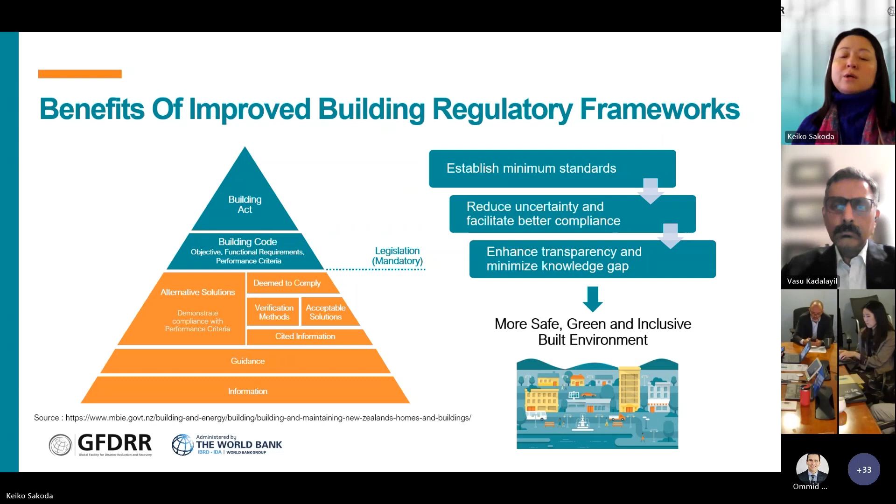But by improving the regulatory framework, we can remove this kind of knowledge gap.

Now I would like to talk about how our team works with the country teams. We work with the country team across different project preparation cycles, and we have different tools across different stages. We join from the initial scoping and dialogue session, where we do a quick analysis of the regulatory framework of that country, and try to pre-identify possible entry points for the dialogue.

Once the dialogue advances and the client is interested in this topic, we provide more in-depth diagnostics, and that's where our tools come in handy. I'll talk about it later.

The next step is about prioritization of investment activities and policy reforms. We have cases of supporting both DPOs and IPFs. In both cases, we help the teams, or the government, identify the prior actions and indicators for the DPOs, and investment activities under the IPF.

We also stay on to support the implementation aspect if the project goes to the board and starts the implementation cycle. Now I would like to talk about two tools that our team has for the diagnostic aspect.

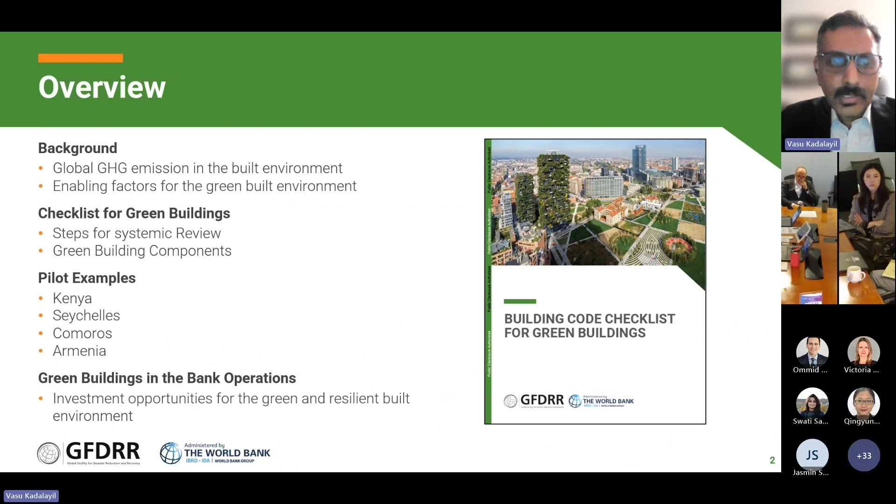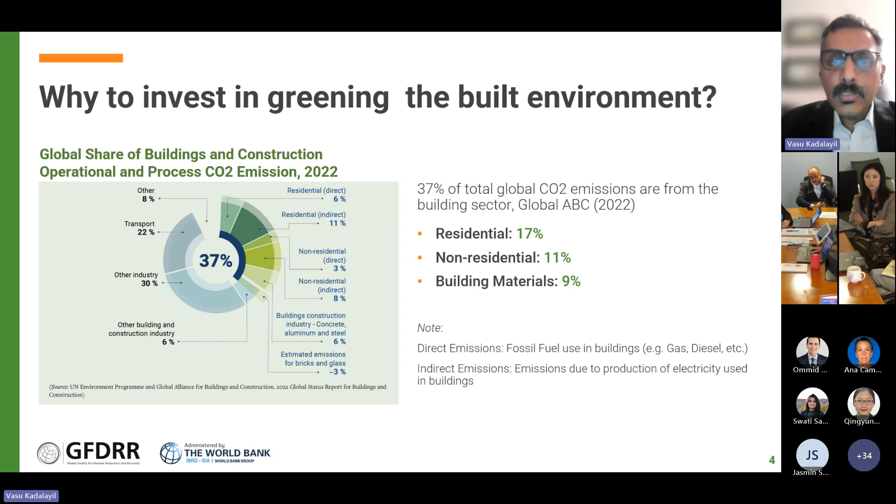So, of course, why invest in green building? Buildings contribute to approximately 37% of the CO2 emissions across the world. The broad breakup being that about 17% comes from the residential sector, 11 from the non-residential, and 9 from building materials. This data is from the global ABC, the global buildings and construction report that happens every year.

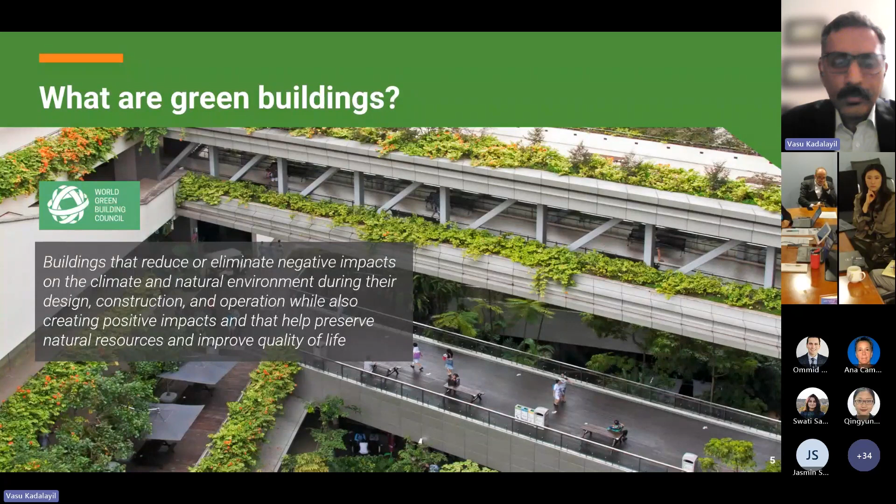This is a very telling statistic that buildings have a lot to do, and improvements of buildings can actually make a huge difference in the global GHG emissions. And what are green buildings? There are many definitions of these, but probably the World Green Building Council's definition can give a fairly large, all encompassing scope. Some call it energy efficiency, some call it by other names. We will also look at it in the checklist itself, where you'll see it has a broad swath in terms of how we define green buildings.

Basically, the CO2 emissions in the green building sector follow the building's fairly long life cycle. Right from material manufacture, which includes extraction of materials, whether it's steel or cement or clay for flooring tiles, and so many other things come from extraction of materials. And then, of course, they're processed, manufactured, and transported. So all of these have certain GHG impacts.

The design process is the point which actually gives you the opportunity to reduce the resource impact, or rather enhance resource efficiency. Broadly, it could be done through energy efficient design, water efficient design, and materials. These are the three pillars on which green buildings stand.

The construction process itself can be streamlined to make it less energy intensive, less water intensive, less polluting. But of course, the big chunk of the greenhouse gas emissions will come from the operations, broadly in terms of the energy and water use.

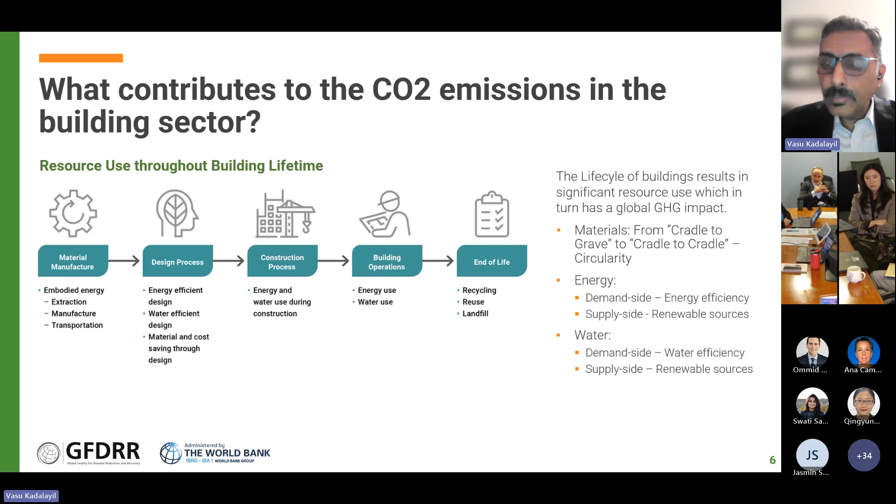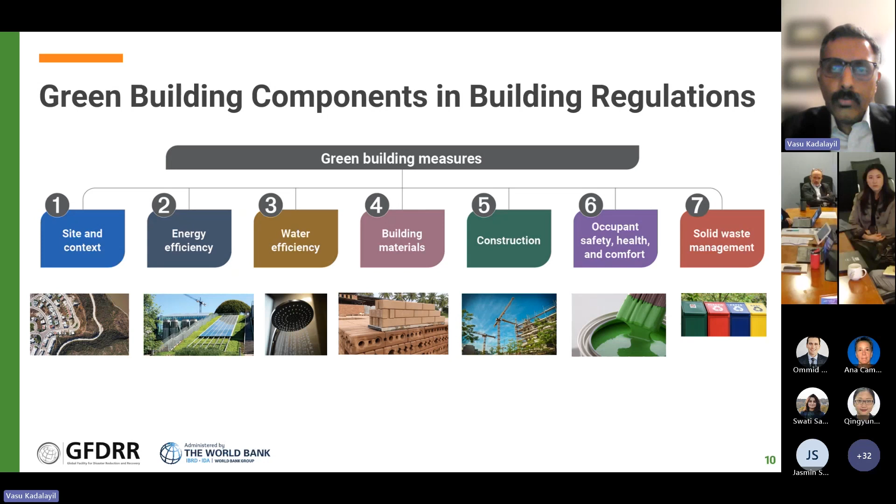We have energy efficiency, which really is the core, in a way, of the number of measures that one can use to achieve a good amount of GHG mitigation. Water efficiency is extremely important - like I said, it's a finite source.

Building materials is another aspect, because once you've selected a building material, you're essentially locking in either a very efficient, low embodied energy material, or a very high embodied energy material. The idea is that by selecting low embodied energy materials, the market will give signal for the building manufacturing market to have lower embodied energy material.

Just to give you an example, I live and practice in South India, and bricks used to be, until about 25 years ago, the most common material for masonry. Now it's almost out of the market, at least where I practice in Bangalore - we've switched to concrete blocks, which have much lower embodied energy. In terms of that whole market transformation, it just makes so much sense.

Construction, of course, is another aspect that one needs to be extremely mindful about, especially now in emerging economies where you have so much construction happening, that construction pollution can really become a big aspect of a city's pollution, like places like Delhi, which comes in the news every winter.

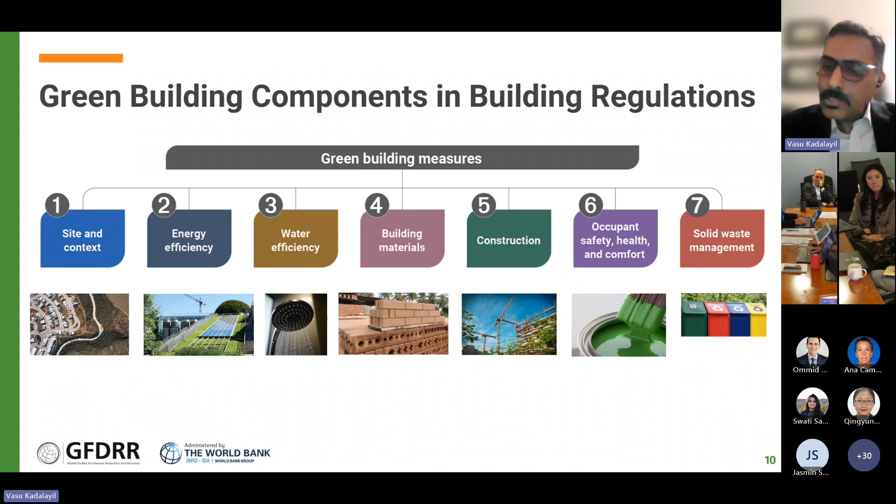Now that has an impact. So if you can design buildings which encourage occupants to segregate waste, it's always much better for the environment.

So just breaking these down, for site and context we looked at 3 broad topics. One was to be able to do some target setting and also create the project team right in the beginning. Ecology and environment is another aspect that one needs to look at.

What kind of ecology are we siting the building in? Does it have far-reaching implications on downstream effects on the environment, on the soil, on the flora and fauna, and all those things? And then, building and transport.

So where is the building sited, and how is it connected to the transport? Is there efficient public transport coming into the place near the building? All those things are as important.

On the energy side, we are really looking at reducing the demand side. That means, let's say, if you have more efficient lighting, more efficient walls, better insulated walls, that would reduce the need for either warmth or for cooling. That's sort of the idea of reducing the demand side measures.

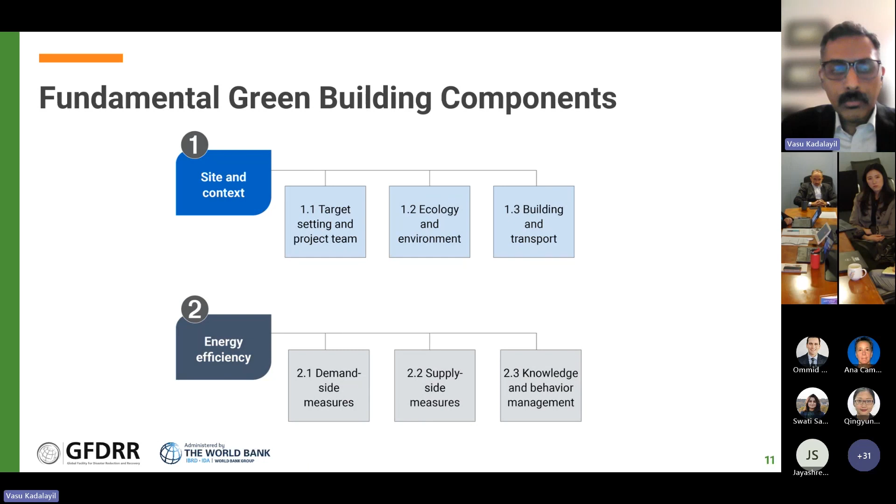On the supply side, you're looking at alternative sources of energy like solar and all that. And then, of course, there is the aspect of knowledge and behavior management, by doing sub-metering and various other aspects that will actually encourage users to lead a much more energy efficient lifestyle.

On water efficiency, very similar. Look at the demand side in terms of having low flow faucets, better showers, and things like that. And on the supply side, try to see if there are renewable or more resilient ways of sourcing water, like rainwater, where possible, so that you're not extracting precious groundwater. Those are the aspects that one can look at a building level. And then, again, the knowledge and behavior management.

Building materials, like I said, looking at recycled building materials, and with more emphasis on circular economy, there is a better way. Just to give you an example, steel is something that's getting recycled across the world now. While you might use virgin steel for reinforcements, you might use recycled steel for security purposes, like grills on your windows, that can be made out of recycled steel. That's becoming a common practice, and we're hoping more companies can take responsibility for the entire circularity of this.

And then, of course, looking at the low embodied energy materials itself. So that has a big impact to play.

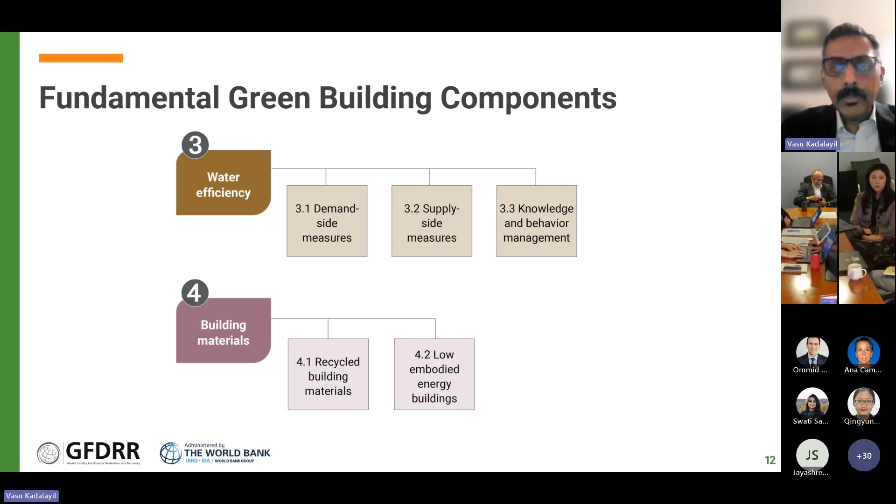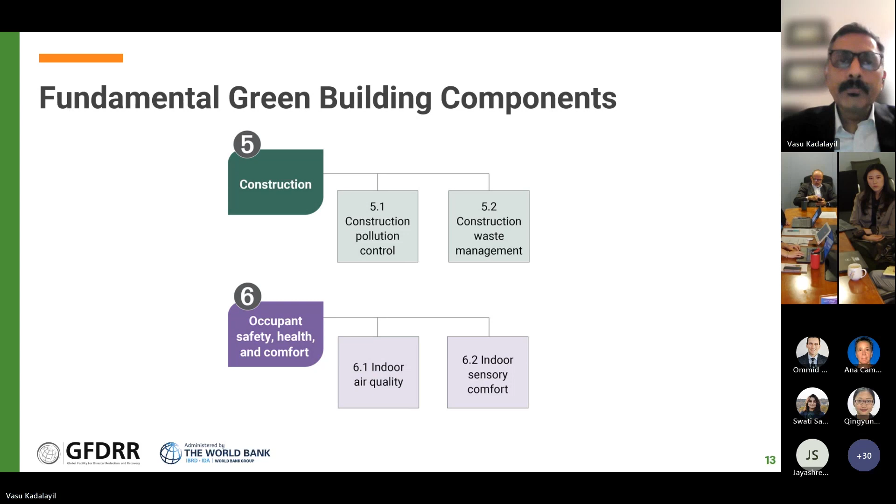Then, of course, the smaller aspects in terms of construction pollution, not really small, but things that need attention. Occupant safety, health, and comfort in terms of indoor air quality, indoor sensory comfort, the CO2 levels inside, especially in large format spaces like hospitals, offices, and hotels. And then the solid waste management, in terms of at least the segregation of waste. So these are the sort of 7 broad components that we have.

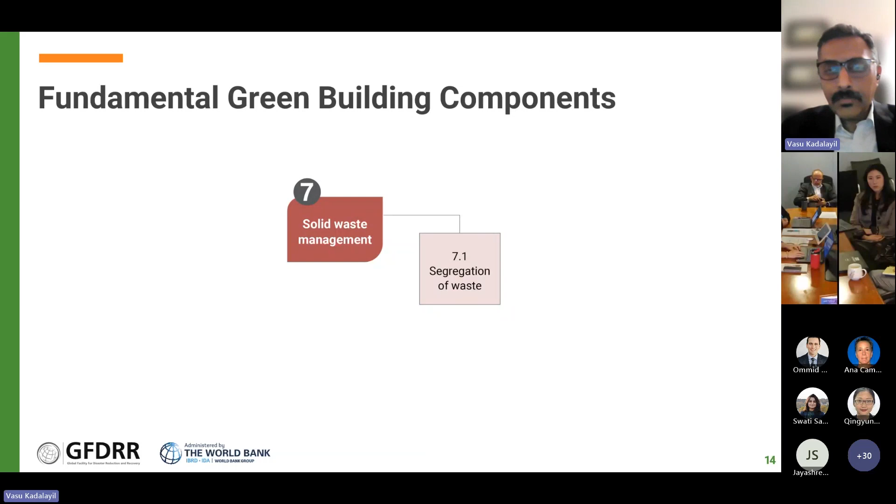So the checklist really is based on this. And some of the interesting aspects, before I get into how to use the checklist, is really the policy instruments that can be used for scaling up green building. This is something that would be useful for people at the bank. You have 2 broad types.

You have the non-financial incentives, and these are just a few examples, not exhaustive. There have been countries which have had expedited approvals, for example. So if, let's say, a building approval takes 4 months, they would expedite it by a month so that the project can start earlier if it's a green building.

Or certain municipalities give you a higher floor area ratio, which is essentially, if you have 1,000 square meters and the floor area ratio is 2, that means you can build a total of 2,000 square meters on that 1,000 square meter plot. In some cases, they would give you an extra 10%, which helps the building owner build more for the same cost of land, making your per square meter cost of floor area slightly cheaper. Those are incentives on the non-financial side that governments can provide.

On the financial side, you have property tax reductions and lower mortgage rates. Certain countries have had, in fact, I think IFC has been active with banks across the world to try to reduce mortgage rates for certified green buildings.

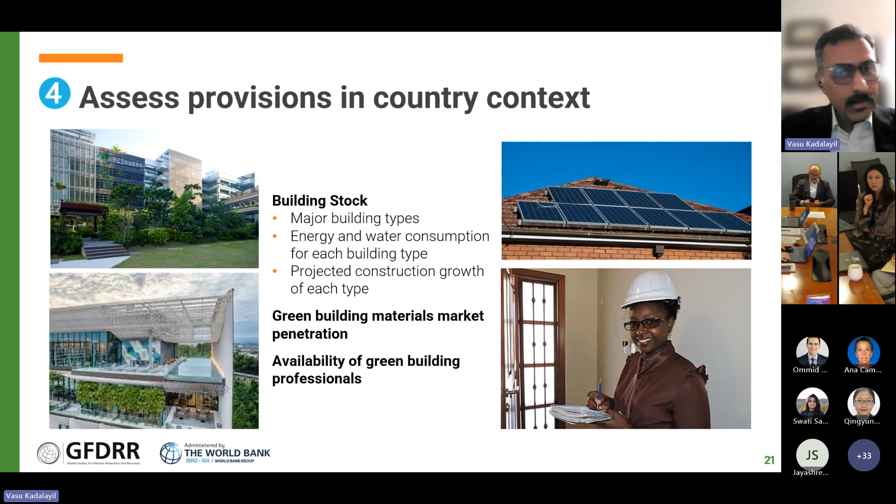What and how well have green building materials penetrated into the market? For example, is solar PV something that's available or not? One needs to be very sensitive to that aspect. Also, what's the capacity out there—how many green building professionals are available, and what institutional structures are available in that country? These are absolutely important to look at as well.

And there's also this interface with other regulations that happens. This is just an example of India, on the building regulation structure itself, shown on the left-hand side. You have the National Building Code, which is not mandatory, just guidance. Then you have the state-level Town and Country Planning Act, which is more of an enabling act. And at the municipal level, you have the mandatory building regulations—but the green building code itself may work in a slightly different way.

In India, for example, you have a separate Energy Conservation Act, which was passed in 2001, and then the first Energy Conservation Building Code that came in 2007 and later got revised in 2017. But you can see that it's very clearly only energy, it doesn't consider water. Water has again been regulated at the municipal level separately, depending upon which state one is in. So it's very important for the country team to understand what the unique complexities of the interface with the other regulations are.

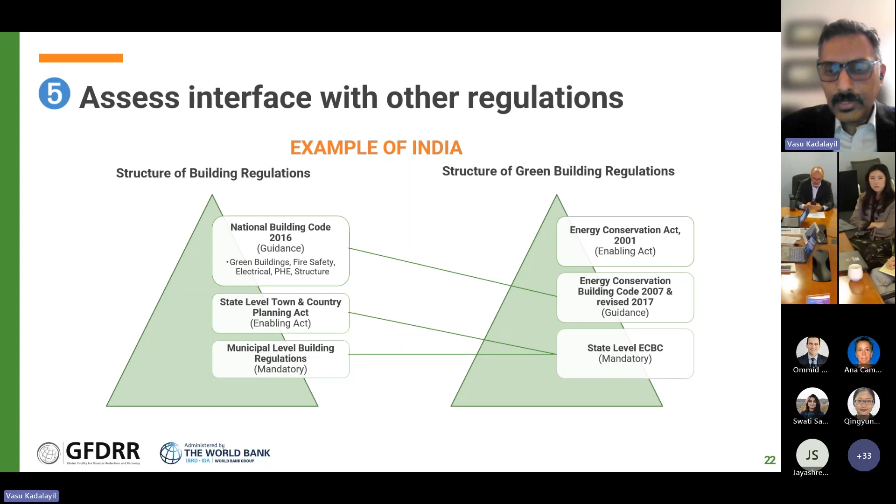And then, of course, you complete the checklist. You can put it into an Excel sheet and look at all the recommendations and put it down as an aspect.

We did a few pilot examples. I'm going to go through this quickly because I see that I'm at the border of the time limit.

In Kenya, there were two codes that had come up for review: the National Building Code itself, and a separate regulation on green buildings. What we found is that they wanted to include all new buildings into this entire space and regulation, and at some level it was trying to mimic the green building certification system. There's always this danger of the government becoming too ambitious and trying to have very high standards for green building regulations. So our recommendation was that it's probably a good idea to first do capacity building prior to the launch, and also to simplify the code itself. There were also some ambiguities regarding certain performance benchmarks that they had mentioned, so we put in our recommendations to simplify those as well and make it more clear.

Then we did Seychelles, which was a broad physical planning building regulation getting amended in 2022. We found certain measures for water efficiency that were not clear, and there weren't too many on the energy side as well. So we felt there was a need for a more rigorous approach to resource efficiency and also better clarity in terms of benchmarks for green measures.

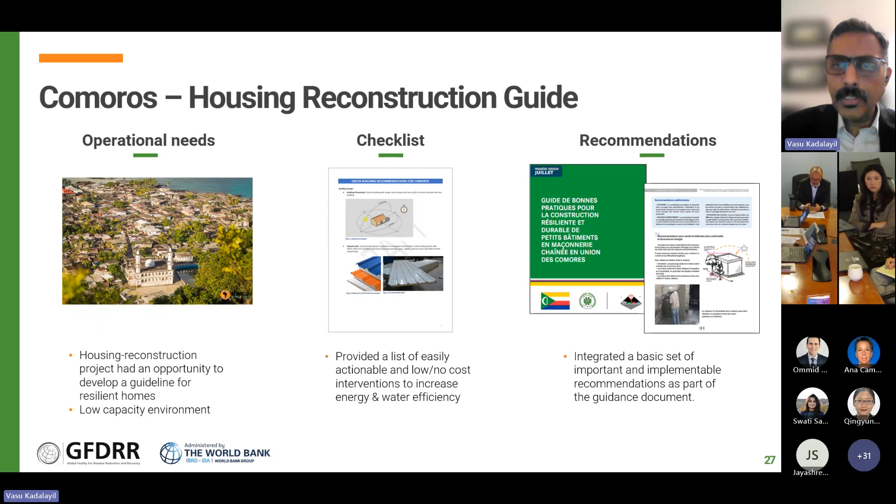Armenia is work in progress right now. What we found was that broadly there were two energy efficient building regulations, one published in 2016 and the other in 2022. We were called in to look at the 2022 version, and we found that it's more a methodology to estimate heat gains and losses into the building, rather than being a directive. So it didn't have the approach that a normal regulation takes in terms of a prescriptive approach. What we've recommended is that this is probably work in progress, and you need a longer engagement on this, but what we are proposing right now is the development of a guidebook.

The idea is to look at two things: one is to put all the existing green building regulations in one place and make it easy for a practicing professional to follow. On the other side, we are also looking at best practices across the region for that unique climate in Armenia. It's extremely hot during summers and extremely cold during winters, sort of 40 to minus 20, so it does have unique challenges. Our guidebook will help professionals navigate the solution regulations. UNDP has been extremely active in this place, so we are collaborating with them on this project.

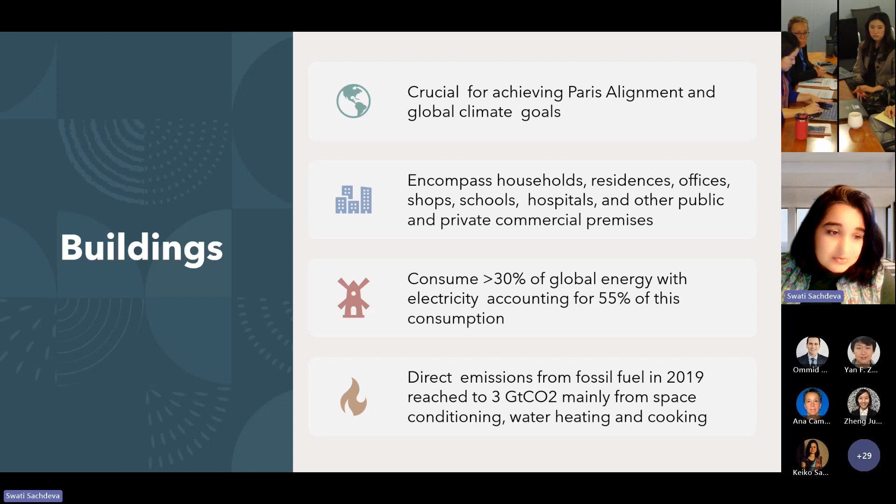So what we are doing right now - some of you would know that we already have a sector note for urban, and building is one of the subsectors in that. But we are also working on a specific note on buildings to help project task teams with all this essential knowledge and tools that Keiko was also talking about, providing answers in terms of how to do the assessments.

But overall, in Paris alignment, if you look at buildings, there is a universally aligned activity list, which was co-developed with other MDBs. These are activities that are doing no harm, or basically contributing to the decarbonization of that country. We're talking about both new as well as reconstructed buildings, which meet either the EDGE level 1 certification, and Omid from IFC will talk a little more about what that means.

While EDGE 1 is the gold standard, we recognize that there are a lot of countries where even building regulations are not in place, as Keiko and Vasu alluded to. So they might have national codes, or global certifications which are equivalent, or they can use passive design features and other things to achieve a 20% energy consumption savings from the baseline of what that building would usually consume.

And that is equivalent to EDGE 1. If you have a building within your project looking at either of those, you can fall into the universally aligned activity list, and therefore avoid the next steps of assessment, which is basically once you assess the risk, you look at the measures to reduce that risk. Of course, if it's a fully electrified, energy efficient building meeting entirely its energy demand through renewables, then it's also universally aligned.

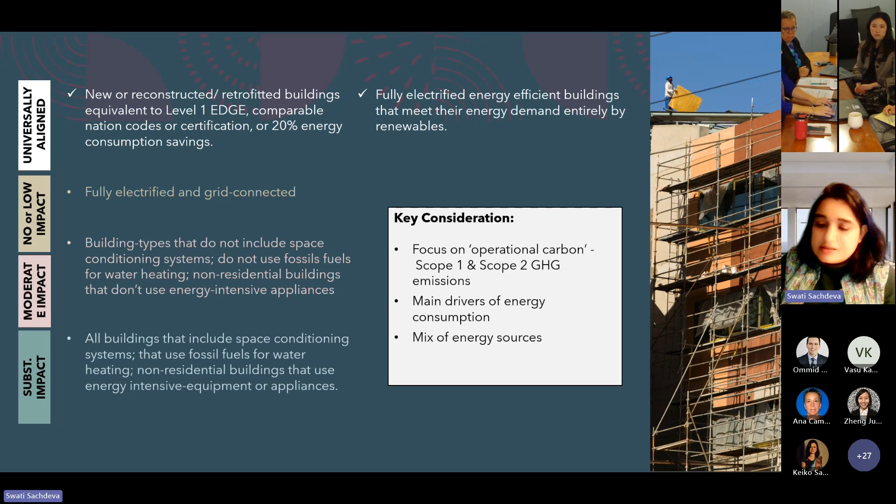So as I said, if your project is in that universally aligned activity list, and it meets that specific criteria we talked about, we'll focus on the compliance. In this, we're going to talk a little bit about the building codes and energy certification that Vasu alluded to.

What you really need to check, because we have these tools that Vasu highlighted, is your compliance with the local codes. Now you will have to check if these standards are equal to or exceeding the level 1 EDGE certification requirements. There are tools out there that can help you do that, and the checklist that Keiko and Vasu alluded to.

There are certain countries which do have global certification. You have EDGE, you have BREEAM, you have LEED, and different countries have their different certifications as well. So that is something you can check. You should also check the compliance and sufficiency of the building codes. Those steps Vasu has already talked about, so I'm going to skip that part.

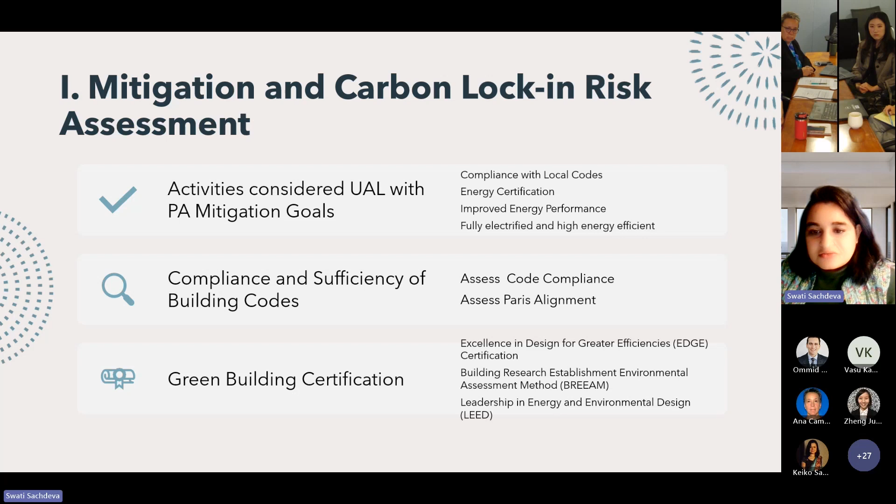But if your project does have a risk, and if it's not in that universally aligned list, then you're looking at measures. There are multiple measures, and the sector note does talk about some of these, but it's a summarized version. It doesn't talk about a lot, and that's why the separate building note we are working on will have a better checklist for this.

The main point here to remember is, can you reduce your energy demand for thermal comfort and lighting? There are a lot of different ways to do that. It also includes passive design features like site planning and building design that Vasu talked about. You have to look at energy efficient equipment — if you are procuring any of those, are there energy standards that you can follow? Of course, keeping in background the project context.

I think that is very, very important in Paris alignment — your project context, your city context, whether it's technically and financially feasible to have that. But we encourage the teams to look at energy standards for anything they are procuring. Electrification for sure, replacing any fossil fuel-based systems and appliances with efficient electric systems. You are also looking at clean energy sources for heating.

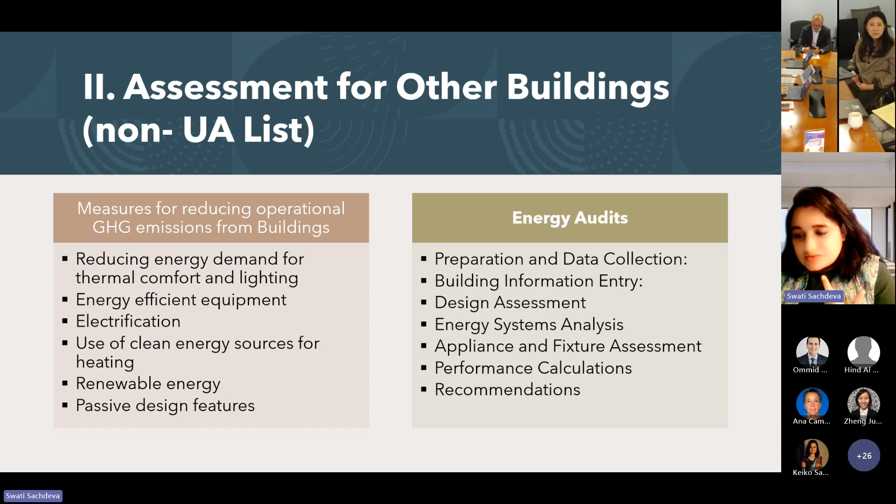So that's another way to check, because this is a question that comes up a lot: how do I make sure that I'm getting that 20% energy savings, which is required for your building to be aligned? And you would need some sort of calculations to justify that. Now, in a smaller building, it is relatively easier if you're using renewables and some design features. In a bigger building, you may need to do an energy audit or use the EDGE tools or other similar tools that are out there. And those tools talk about not just the energy, but also your water conservation and other things that Vasu talked about.

On the adaptation side, as I said, building investments will face significant impact. I think no matter where your building is, whichever city, there will be some sort of physical climate risk. And a lot of the time, we do this already in most of our GPURL projects. We do look at resilience, and we do flood modeling and all of this in the preparation studies as well. So that can all feed into your Paris alignment assessment. But I do want to highlight that you need to look at the overall palette of climate risk, right? And not just flooding or sea level rise, but also extreme heat. And buildings will be affected by that.

So you need to, again, it's context specific. It will vary from location to location. There are tools out there in the bank. You can use the climate change knowledge portal. You can use climate and disaster risk screening. Again, it uses country level data. So if you have city level data, if you have granular data, then we encourage the teams to use that for their...

...identifying the adaptation risk. And then, going stage by stage on different measures to reduce that risk to an acceptable level. You can never get to that low level, but reducing it to an acceptable level. Now, this can include things on the planning side, having more climate-informed risk planning in the design and construction. It might also include institutional capacity and coordination where building regulations come into play, operation, maintenance, retrofitting, etc. So we have all these measures listed.

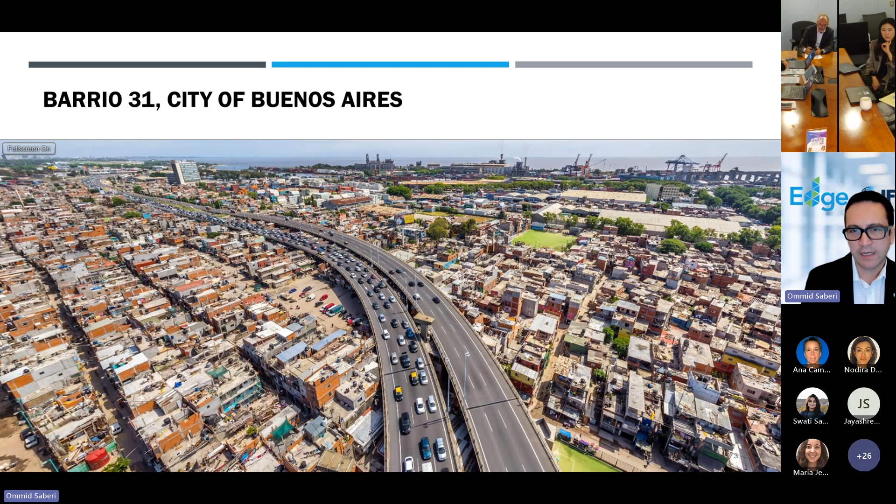I want to give you some examples so we can see how this forms our built environment. This is a neighborhood in Buenos Aires that was a slum area and has been upgraded by a World Bank project. You've probably seen this before, but the visuals give a better sense of the impact of greening the assets. These new strips of housing buildings are being EDGE certified with 52% energy efficiency, 30% water efficiency, and 45% materials efficiency.

As you can see, these buildings already have solar panels for electricity and solar hot water to generate their hot water supply. This not only brings a better quality of assets but also delivers savings for the tenants, and I'll show you a short video of how these savings impact people's lives.

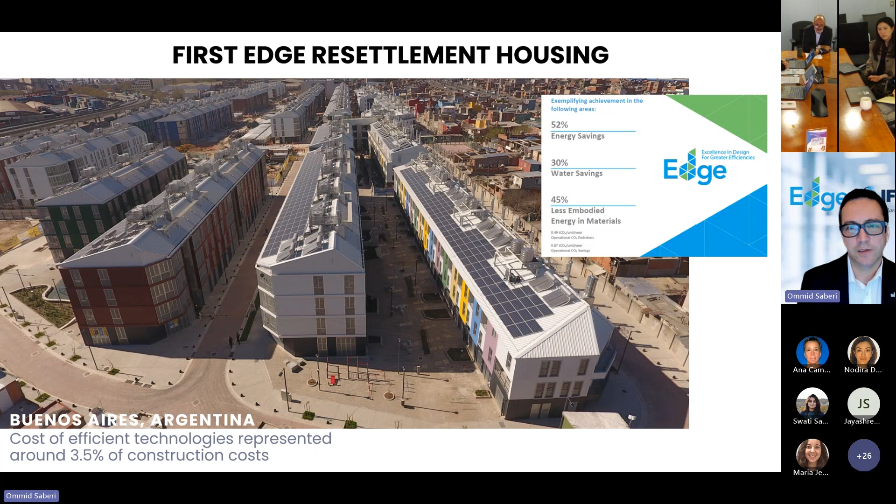This is a hospital project in Bengaluru, India, also EDGE certified. One interesting thing is the savings: it saves $5,700 per month on utilities. With that money, one can hire doctors or nurses to support hospital work, rather than spending it on utilities. That's the benefit of this type of work we can offer clients.

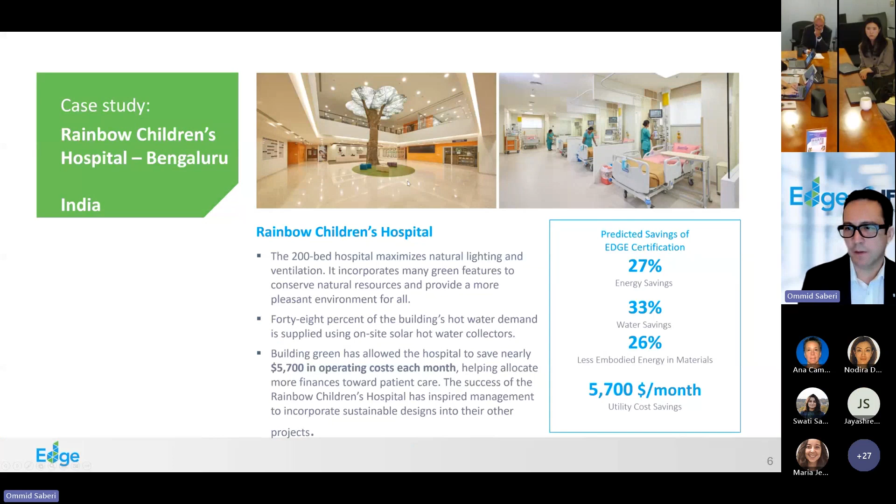I'm going to stop sharing and share again to make sure we have the sound for the video. The next slide is a short video for you to get a sense of how this project worked in South Africa, so I'm going to play it now.

When we lived in Elsies River, there were a few problems. The gangsterism there is very bad—boys as young as 8 or 9 running around with guns. You can't let your kids play outside anymore. I didn't want my kids to grow up in that environment. Madulumo is a not-for-profit company I started in 2005, trying to get people out of bad buildings and off the street into decent accommodation. Inadequate housing brings its own challenges—gangs, drugs, alcohol abuse, a breeding ground for crime. So we wanted to create hope, and housing is one of those things that creates hope.

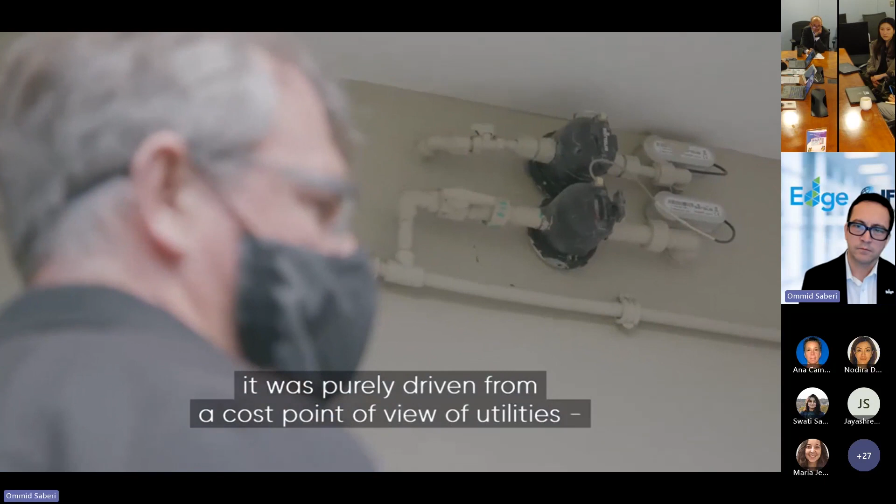When Madulumo started to look at the greening of our projects, it was purely driven from a cost point of view of utilities. How can we get utilities down? So if we talk about electricity or water, how do we design in such a way that you get a green building?

The IFC is an International Finance Corporation. They designed a tool called EDGE. EDGE stands for Excellence in Design for Greater Efficiencies. EDGE helps developers to think green, and to apply it into their design from the onset.

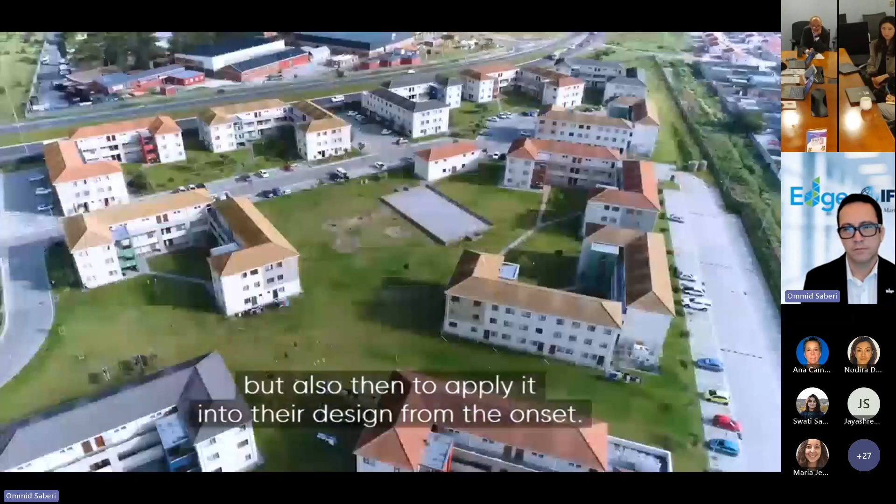Bella Gardens is the first EDGE certified social housing project in South Africa. Our tenants are telling us how much better it is to live there.

For me, it's to have security in your complex. It's most of the best things we experience. My kids can play outside. The first thing they noticed was the parking, because there wasn't parking before that you can take your kids to. I'm standing by the window and I look to the parking, and it's very nice for them.

We thrive for something different. And with this, we were privileged enough to get an EDGE certificate. Yes, it gives us food, fruit, vegetables, all in there.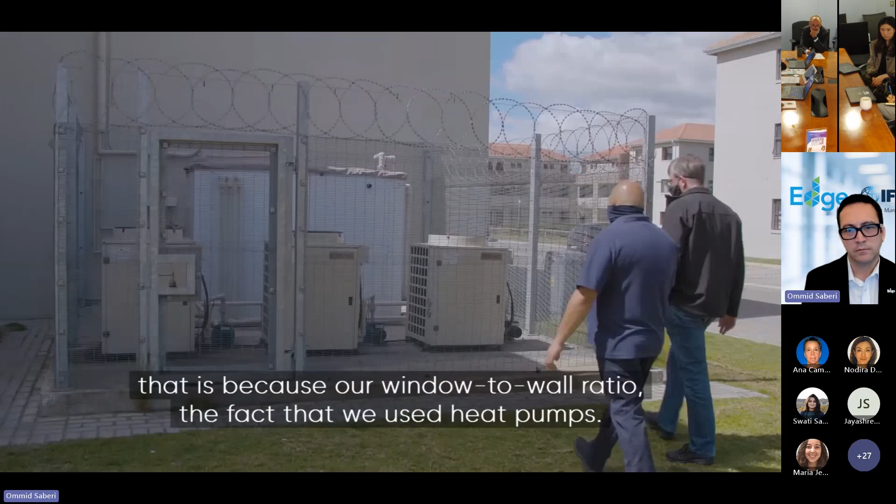For Bothasig Gardens, we got a reduction in energy. That is because of our window to wall ratio and the fact that we used heat pumps. Water saving is because of the water restrictors that we placed onto all of the taps. People can see the consumption, and the education that goes about that.

If you know you stay in a place which was designed to be energy efficient, there's a different mindset there, and you also want to save energy. What does it mean for me and my family? And then you start to use less water because you also want to contribute to the ethos.

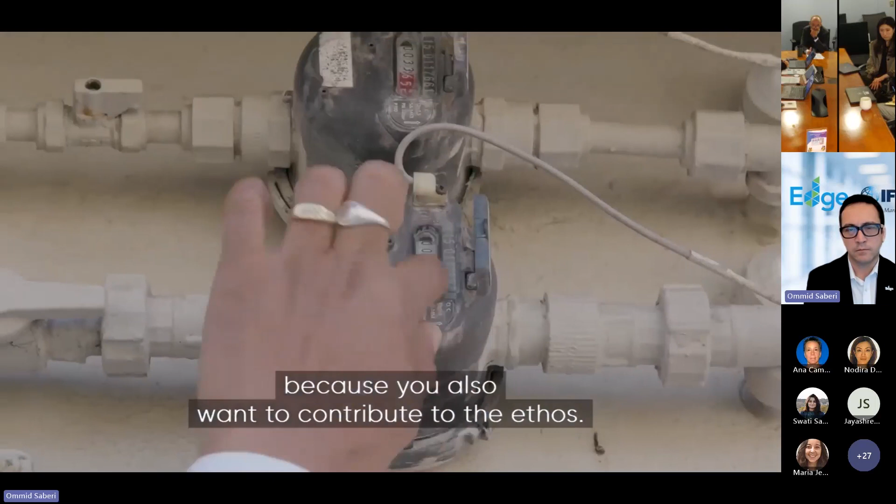I'm saving maybe around about 1,000 rand every month. There's a huge difference between that time and now. So now I can go extra with the food. I can buy extra food, extra clothes, extra shoes for them. There's no more 'I don't have now, and I can't do it now.'

Knowing that people can save money makes me really feel that I'm doing something right, or at least we are doing something right. All we are is a stepping stone. Our objective is to get you through the journey, giving them that step to the future.

With the savings that you can achieve just by following the simple green solutions which we have in place, you will grow and get your own place.

So I applied to move into Bothasig Gardens early in 2015. At Bothasig Gardens, we saved with rent, we saved with electricity, big time. Big news, we're moving to a bigger house.

When you change people's behavior patterns, you change their lives, not in a small way, but in a big way. And sustainability showed me that there are things better out there than what we used to have.

And I think that's the blueprint. The blueprint is how does it make a community change? How does it make children look different at the place where they're staying? We can do this again. We've got a blueprint that we can do again, and that we should do again.